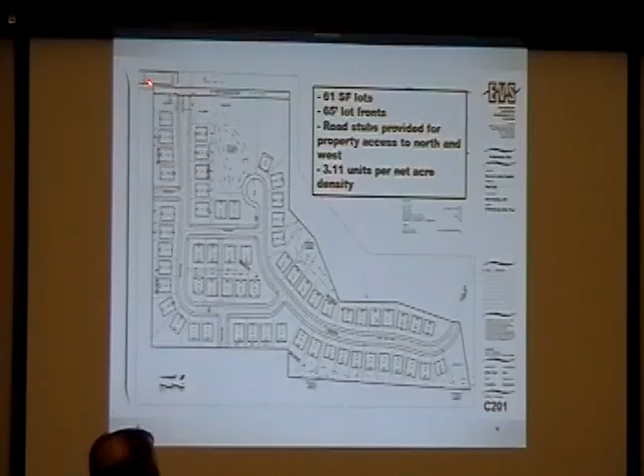The entrance here, coming southbound from County Road 19, the county has asked us for a right turn lane in the right-of-way area here, which we've designed into the plan. So there's a right turn lane into the development and 2 lanes exiting. One is a left turn lane and one is a right turn lane exiting the development. We've shown the connection at the request of staff.

We've shown the connection to Grandview right here. Part of our proposal is to add 2 feet of width to Grandview, and where we ended up at Planning Commission was that originally it was thought we'll add it to the north side, and we left it to where we're going to add 2 feet where it's most practical, and it isn't clear exactly where that 2 feet will come from yet. So with a 2-foot widening and then a total overlay all the way out here to 19, that's in the proposal we have now. I think that's about it in that chart.

The vision for the homes is what we feel the market opportunity is calling for, and that is single-family homes. I would guess virtually all of them would be 2-story. There might be a Rambler or 2 built, but probably not very many. Sizes ranging from 2,300 to 2,800 feet above grade. These are going to be 4-bedroom, 2.5 baths. You would expect younger families to be primarily purchasing the homes.

We're going to propose in the architectural covenants a hardboard siding look on the front of the homes. The product names are either LP SmartSide or James Hardie, and then some attractive stone and brick on the fronts. We see finished prices for the homes ranging from the low 400s to the low 500s. We will have an association which will manage the architectural covenants, and then also the outlots in the neighborhood, the storm ponds and the wetland areas, would be owned by the association through that mechanism.

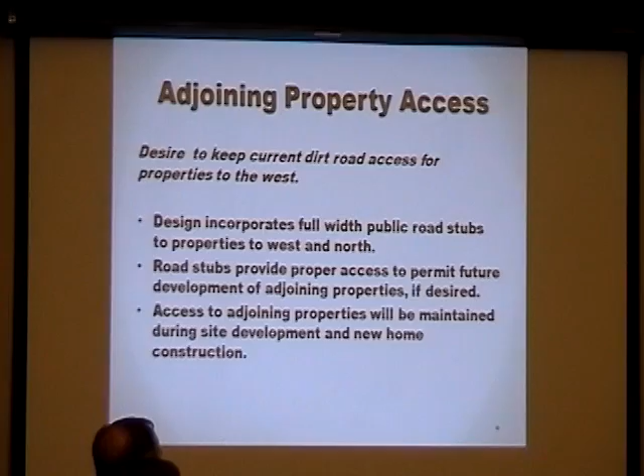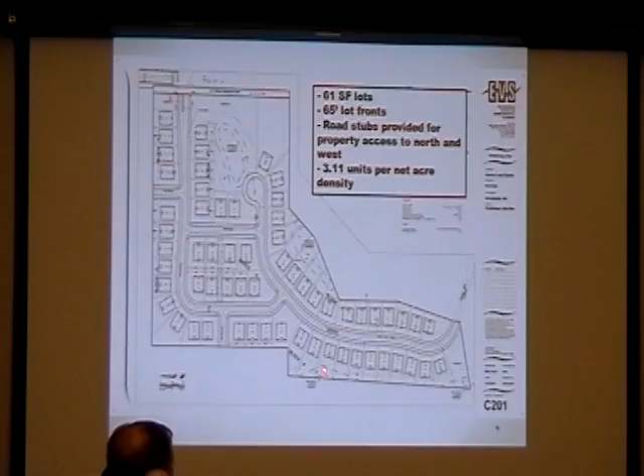It's also going to be essential that we maintain access to the sites during construction. And I think our strategy would be, just going to back up a little bit here. So as we're developing the site, we would probably keep the current road as is, and as we build through the rest of the site, we'll eventually get to the point where this road is built out, and then we can go ahead and have access run through this road, and then this will no longer be necessary. But we will work it out such that obviously everybody has access at every point along the way. We're not going to leave anybody stranded during construction.

Stormwater management. I'm going to have Dave Nash come up here in just a second. But several concerns we heard were the excessive amount of stormwater that's to the west of the property that comes down to Minneapolis Avenue. And also there were some concerns about the stormwater leaving to the northeast and going under County Road 19. And there were some neighbors on the other side of County Road 19 that had some localized flooding problems.

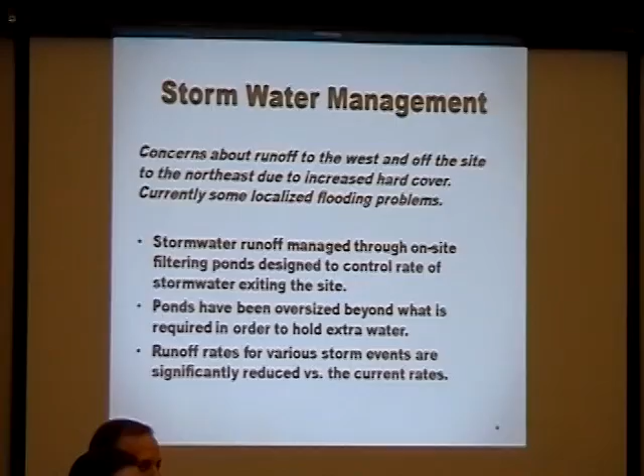And so what we committed to do was to try to oversize the stormwater ponds on the site, and rather than just doing the minimum and keeping the runoff rates where they're at, we tried to oversize them, and we have, and we're spending quite a bit more money to do that, and try to hold as much water on site so that to the extent that the site today is contributing to some flooding problems around it, we're going to make our portion better. I don't think it alleviates everything in the surrounding area because it's more than just this golf course site, but at least we're doing our part in trying to address that issue. Dave, why don't you come up to do the next slide and show exactly what we're talking about here.

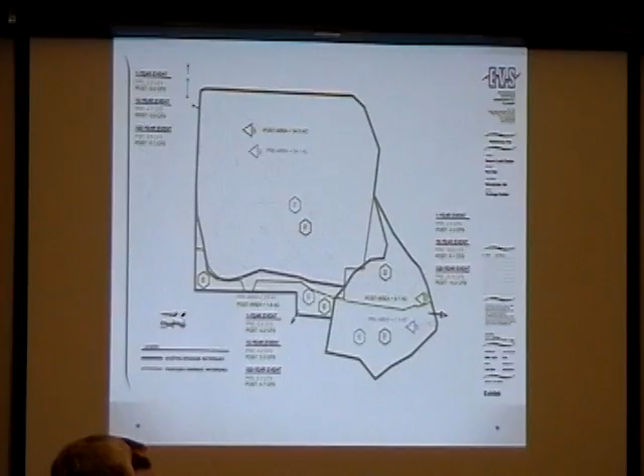Good evening. I'm Dave Nash with EVS Engineering. As Pat said, I'm the civil engineer for the project, and I put together this exhibit. Included in our submittal packet for preliminary plat was a stormwater management plan that city engineers reviewed, and the Minnehaha Creek watershed will review as we proceed in this project.

As Pat said, the requirement for this site and for any development site is post-development conditions have to meet the pre-development conditions for rate control, which is CFS, cubic feet per second. Then beyond that, we have to do some water treatment and filtration, infiltration based on the new NPDES rules. What this exhibit shows is based on our oversize of the ponds and the filtration and infiltration ponds that we're using on the site, we are reducing the flow rates on the site beyond what was required.

For example, there's 2 areas. I have an area that goes out to the north, and the table shows on a 1-year storm event, the pre-development runoff from that site is 2.2 CFS, and post-runoff is 0 CFS, meaning on a smaller storm event, our filtration pond should be able to take all the water and there won't be any water running off. Same goes on a 10-year storm event. The pre-development rate is 4.7 CFS. We reduce it with our ponding and filtration to 0.9 CFS.

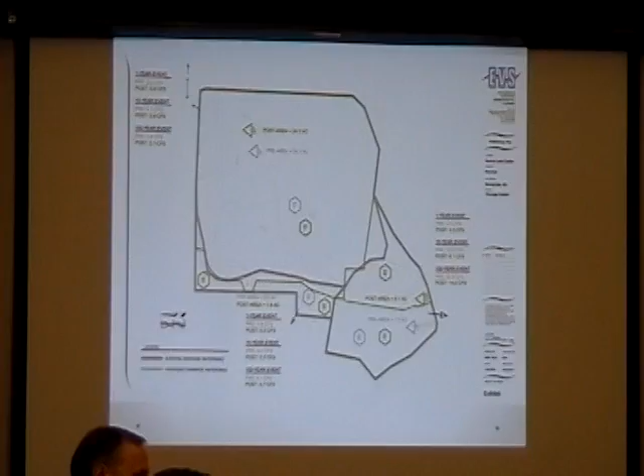Can I ask a quick question on that? Yes. We went to a water seminar last Thursday, and recharge is a huge issue, and we think there'll be some regulations coming down the road. Is there a way that you could use that stormwater pond to irrigate these 61 parcels? It's not a requirement. It would be a significant added cost,

and I don't think these ponds would be large enough. What happens anytime you try to use a pond to recharge it, you end up putting in another well, because when do you water? When it's dry. Yeah. So there's no water in the ponds. You need a well to recharge the ponds itself. But it's not treated.

Pardon? But it will be treated water. Correct. That's what we're trying to get away from, is using drinking water to irrigate people's properties. Understood. So I just wondered if you'd considered it. Okay. Let's keep going here.

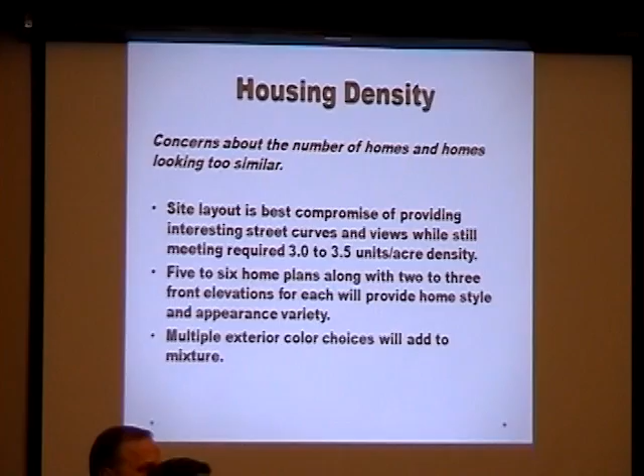Housing density. Now this is something that has been brought up, and the density is driven by the current zoning for the site of 3.0 to 3.5. We're within that range, on the low end of that range. And so the best we can do is what I had indicated earlier, which is to provide as interesting a site layout as we can and as much home variety as we can. And we feel we've done that, and we're within the range on this.

County Road 19 impacts of traffic. There were some concerns about the additional traffic associated with 61 homes and what it would do to the traffic there on 19. And so, as we've discussed already, the only change Hennepin County is asking for is the southbound right turn lane. For the traffic that goes north to the four-way stop at County Road 151 and 19, they're not asking, to the best of our knowledge, for a traffic light or anything there. The traffic is felt to be well within the capability of County 19, even with this additional traffic.

And so, just for reference points for everybody, the current golf course seasonal peak traffic is about 110 trips a day. It's down from about 160 trips in previous years, which is part of why they had to sell. And so, although there will be more traffic than the golf course traffic with 61 homes, it's not all incremental. The golf course traffic is being replaced with the home traffic of about 305 trips per day.

And then the Grandview connection to the south: earlier plans, we had shown a cul-de-sac there with a breakaway barrier in order to not put the traffic onto Grandview. And at the request of staff, our actual plat submission is what you've seen. We're actually making that hard connection and then improving Grandview by a couple of feet. And so we had been willing to go either direction. We understand that there's pros and cons of each.

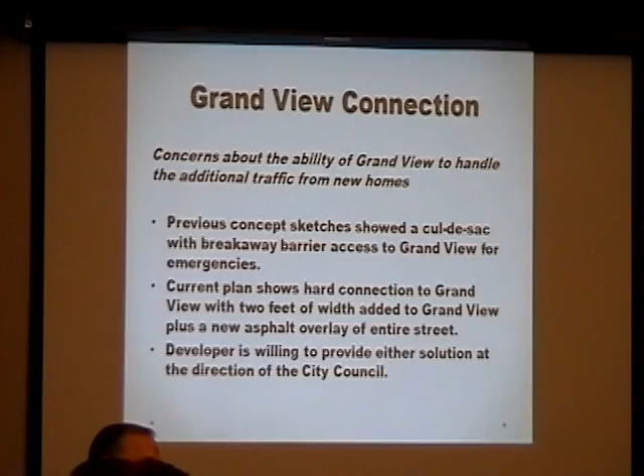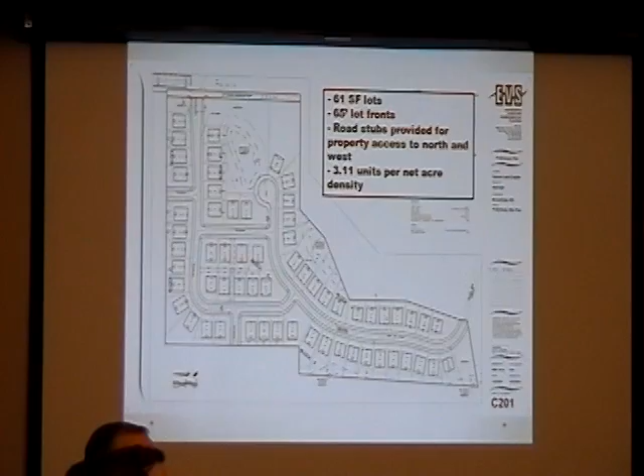But at this point, it sounds like we're going to stay with the connection unless something changes. And so whatever the council decides we would be willing to abide by. And so that's where that stands. And I think that's all I've got here. We'll go back and put this chart back up if there's any questions. Any questions for me now, or would you like to?

I have just one, I think. I was writing some things down when you were talking, and maybe I'll wait until the end; maybe that's what I'll do. I'm anxious to hear from our residents as to what they said. There were many of them here at Planning Commission, and although we've all agreed that we won't do it the same way as we did there, since that was a public hearing, I do want to hear from them and see how it's coming. So why don't we do that first, and then maybe you'll have answers for them as well. Okay, thank you.

Council, do you have any questions before I start with the people? Or? Until later. Okay. Jody Youngquist.

Jody and I are pen pals. A couple of you are my pen pals.

All of us, yeah. Madam Mayor, council members and city staff, I'm Jody Youngquist, and I live at 950 Red Oak Lane. So my house is right behind this development, and what will continue to be Red Oak Lane, not Grant Avenue, right, guys? Yes. I have to keep checking on that one.

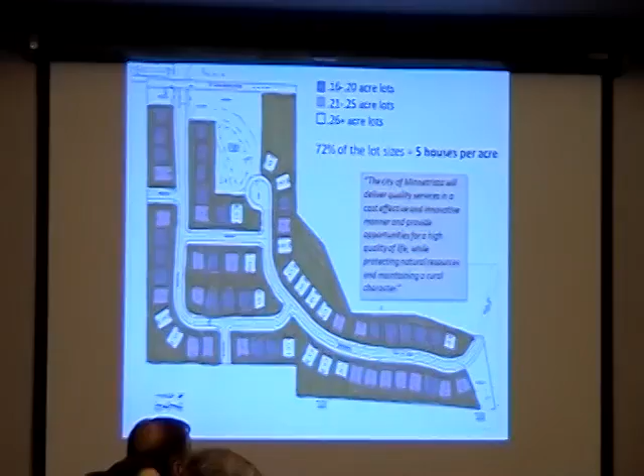First, I just want to thank all of you, all of the staff and the council members who've taken the time to answer all of our questions over the past week. It's been greatly appreciated. It's my first time going through this process, and I've been very grateful for everything. Oh, thanks. Secondly, I want to thank you for letting us have a little moment to speak today. We've done our best to consolidate the thoughts of our neighbors and be respectful of your time.

I've lived in Minnetrista for 16 years. I'm the newest neighbor on Red Oak Lane. Most of my neighbors have been there for 25, so I'm feeling a huge impact on this. I can't imagine how they're feeling. My children take the bus to school from the Covenant Church parking lot, at that bus stop, and I drive downtown to work every day, so I'm well aware of traffic concerns at both the Grandview Avenue exit and the Red Oak.

Red Oak Lane and the neighborhoods surrounding the golf course will be severely impacted by this development, and what we're asking is that the city and developers take our concerns seriously and work with us to find solutions that allow a beautiful development, as well as maintain the rural character of the neighborhood. And I think it's really important that we take a look at the mission statement for Minnetrista and keep that in mind as we're doing this.

The city of Minnetrista will deliver quality services in a cost-effective and innovative manner and provide opportunities for a high quality of life while protecting natural resources and maintaining a rural character. And I have real concerns about maintaining a rural character with what we're looking at here. Green space is one of our big concerns, and we know we can't change the density. The horse has left the barn. We beat it to death a week ago. We don't need to do that again.

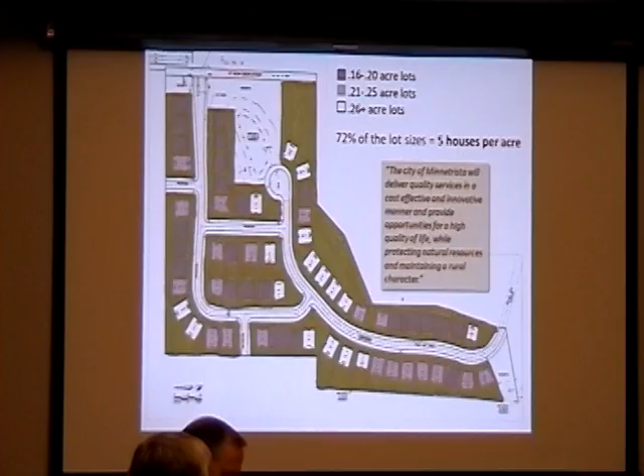I feel in all fairness, the city should try to give back the green space to this development wherever we can. Money taken from the development for park dedication fees and trees should be put back into the development versus being collected and given to another community that has not been affected by this. And as stated, the developer needs to remove 54% of the trees, and from what I read, and the fact that there's no room for more trees to be put back in here, the city will be receiving $218,600 in fees for the trees.

We'd like to see the city support expanding replanting boundaries for environmental enhancement on the private property surrounding the development, and to further define the privacy perimeter and help maintain at least a portion of the views that the current residents have. And I was really glad to see what these guys are doing with the trees in these lots, but we have a lot of money left over for trees, and it would be nice to be able to go outside the boundary, which I believe you guys have the ability to change, to help improve the view of the houses that surround it.

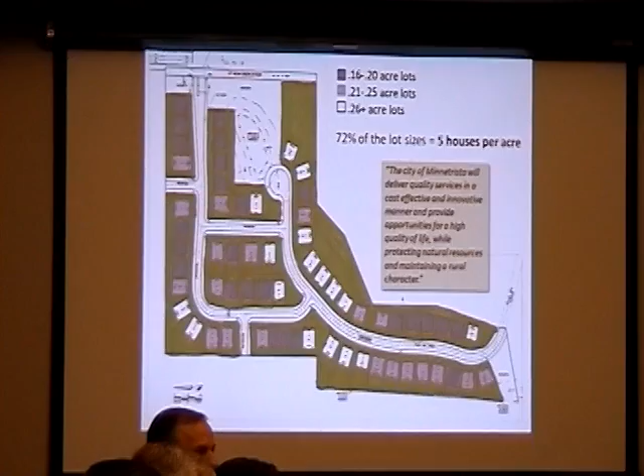And if the city is collecting this much money, we'd be curious to know, where does that go? It goes to the park dedication fund. It can be used for nothing but park. Okay, no, the tree fees, sorry. Oh, the trees, I'm sorry, you're at the trees. That's $218,000. Yes, that's a very good question. I mean, and you can have a say-so in that to some degree as well. We have a say-so, or?

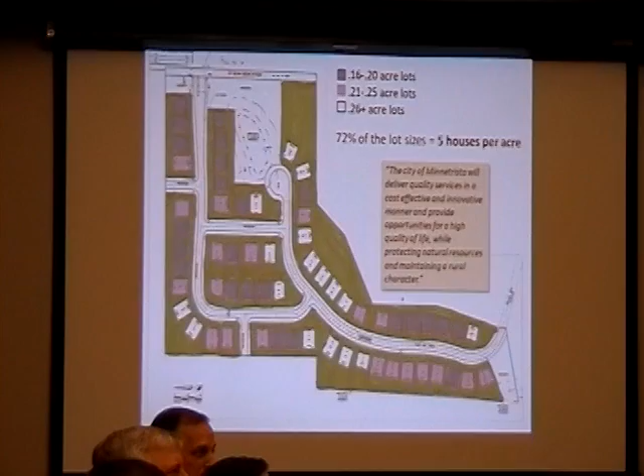Well, if you want to form your group and say, you know, we get X amount of dollars, and we have a tree inventory, right, Matt? Before we put, am I way off base here? Madam Mayor, members of the council, what she's referring to is our tree enhancement fund. Right. So $100 per caliper inch would be required per what they're not meeting in our ordinance.

We do have a policy set for that tree enhancement fund. The main goal of the fund is to replace trees within the community. That could be done in various ways. One thing she suggested was some of that money be allocated to the adjacent property owners. That certainly is acceptable per the policy. Another would be replacing boulevard trees throughout this community, replacing park trees or planting more trees in the park.

The main goal of it is trees, but it also allows for environmental enhancements too, which can further be defined and is up to the discretion of council per the policy where it goes. But what she is suggesting would be allowable use of that tree preservation fund if the council so chooses. I think you put it better than I did. Thank you. Sorry. And we respectfully ask that you give as much of that back to this community as you can to try to help keep it pretty.

Another question that we had regarding the trees that are going to be on the perimeter, and I don't know if this is for now or for later, but will that buffer of trees be protected by the association to prevent future property owners from taking them down? Or can an association have that in there, that you can't just go and cut down the trees in your backyard? Maybe Ron could respond, or Dave, you've probably been working on this for so long.

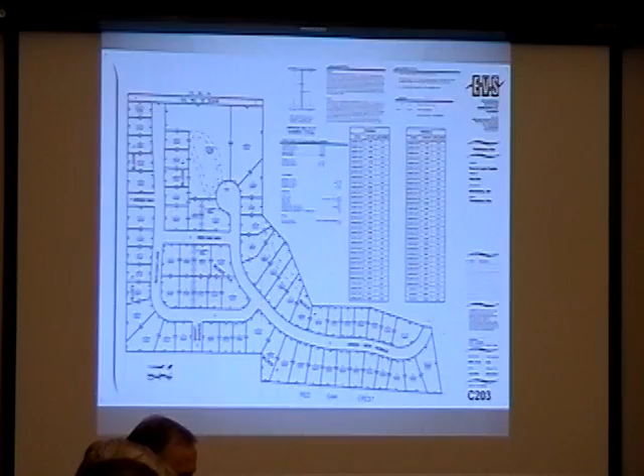The last thing is just mentioning the cul-de-sac. The city engineer made the point at the planning meeting regarding the desire for through-street traffic for emergency vehicles and city plows. I think the emergency vehicle concern could be taken care of with an emergency breakaway entrance. And I think it's really important for you to consider the safety next to the park. It's 40 feet from the development. A through street's going to mean more traffic by the park, which is the only place the children have to play, and they're walking up the street to get to the park. And current users of the walking park take that trail up from Minneapolis Avenue and cross Grandview Avenue to get there.

And in closing, I just want to say I feel like the City Council does have a choice when it comes to maintaining the rural character of this development. I've pointed out several ways you can reduce the number of homes, add green space, and make it a safe place to live, while still meeting the Met Council requirements. We fought hard to get the density down, and the lots are so small and the houses so close together, it no longer feels like the Met Council is forcing us to cram all this stuff in. We're making some choices here on our own to not have green space and to have a cramped environment. And thank you very much for your time.

Thank you, Jody. I appreciate your presentation a great deal.

The second person is Sue Harrison, I believe. Yes. Hi, I'm Sue Harrison. I live at 4935 Grandview, the end of the road. Madam Mayor, council members, and staff.

Not to be disrespectful, but I doubt the Planning Commission, City Engineer, nor staff have any understanding of the safety issues that will result from making Grandview a through street. I'd like to give you a little view of my world on Grandview. As I said, we're the last house at the end of the street.

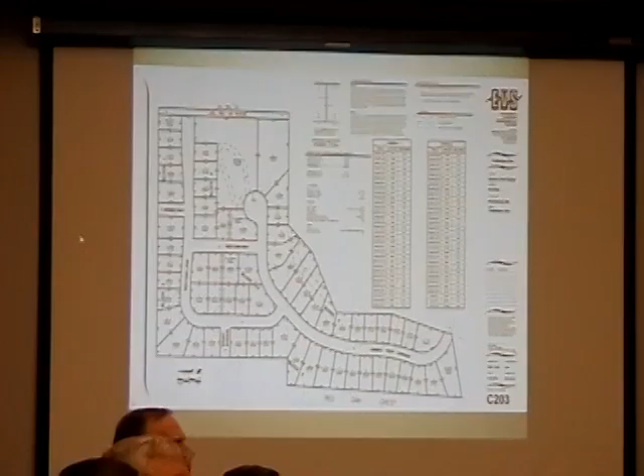I mean, that would be really tough for residents to have company. So you don't go down to 20, I don't know, maybe you go down to 24. You can still park on either side of 24 and still have a car get by. Right, and I know some communities do parking on only one side, and that gets to be an issue. I don't know.

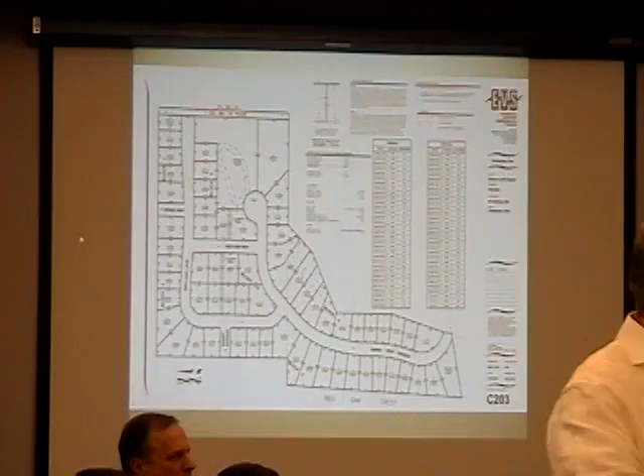Yeah. I guess the only other comment that I was going to make is, I know you're looking for 65-foot wide lots, when our standard is 70. And you're at about 7,200 square feet, and our standard's about 9,500. I was wondering if there's any way that we could increase those. I know we can't get them to 70, but get them close to 70.

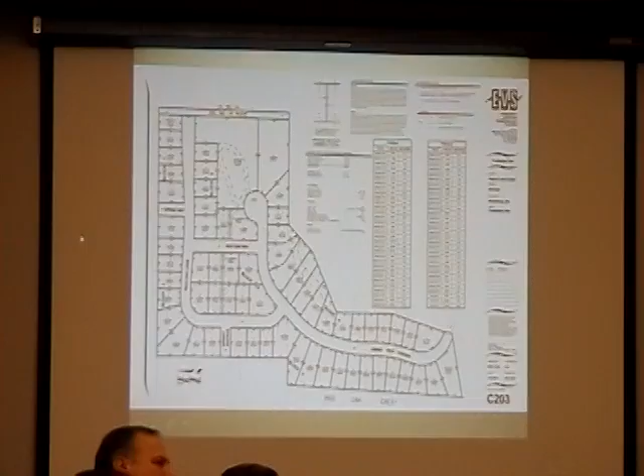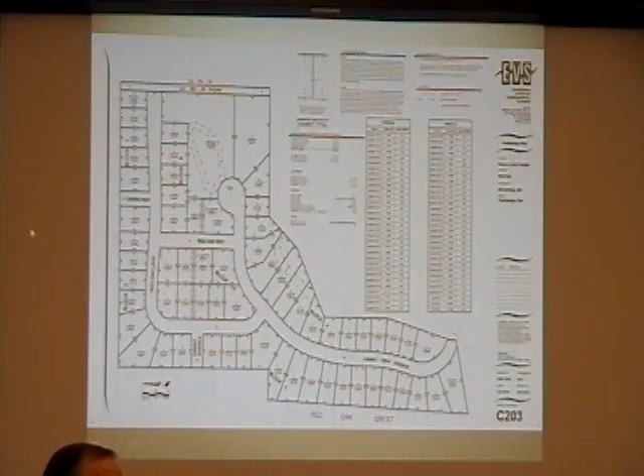As you look at the plat here, we've looked at several options, and the PUD exceptions that we're asking for are really what is necessary. It's just not possible to have 70-foot lots. Just to add one thing: we're asking for the PUD down to 65 feet for flexibility, but if you actually look at our preliminary plat and the dimensions, there's not a whole lot of lots that actually are 65 feet.

We need that in some of those areas to meet the density, but for example, if you pull out our preliminary plat on sheet C203, the majority of those lots are 70 feet wide, 82. Every lot in this development isn't 65 feet wide. There's just some of them that are, and we need that flexibility to get down to the density required. Do you know how many are down that far? I have not. That would be interesting. Give me 5 minutes and I can maybe count that.

Okay. Right, and where are the 65-foot lots? Let's go through it here, Dave, because that would be good. I can tell you the 65-foot wide lots are along that south end along Grandview. Right, that's what it looks like. And what would be the problem with making those lots a few feet wider? Then we would lose lots and we wouldn't meet the density. Well, you're already above the minimum, right? Yeah, we are a couple lots.

First of all, I think we should talk about a couple things. The 58 is really 59, I think, because if you take the net area and you divide by 58 lots, you end up with a 2.96 density, not a 3.0 density. So you need 59 lots when you do that calculation to get over 3.0 density. If you go the other direction, you end up with a rounding error. I know it's a nit, but I think 59 technically makes the formula work.

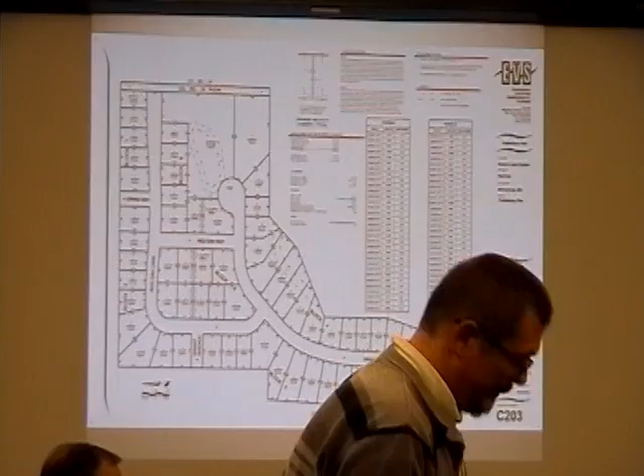But we always meet 65 feet at our front setback, and there's only 15 of them that are 65, the rest are over 65. Well, for sure, it's a very difficult piece of property to develop. It's very emotional because people have used it for lots and lots of years, and we all liked the Wang Stearns, and they built a lot of things out here, and so it's hard. So, try to get the best you can out of it.

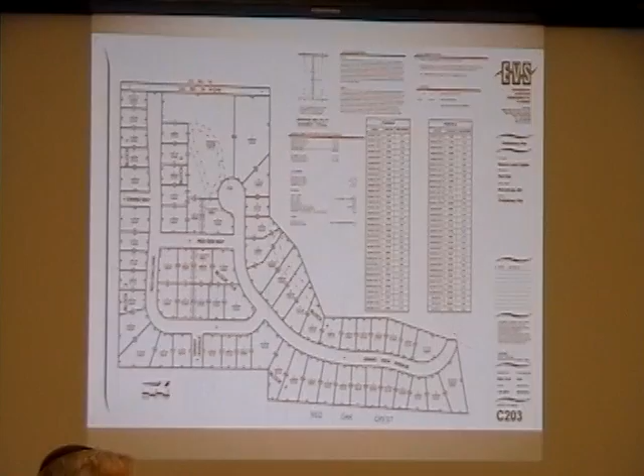Do you have anything to wrap this up with, Mike? Because we do have to move on eventually. Yeah, Madam Mayor and Council, you do have a number of action items for you this evening. Again, there's some considerations for you on the table. From my perspective, there seem to be at least 2 main areas of concern. One is the cul-de-sac versus through street. And the other is the park dedication versus the donation of the land. Those really seem to be the 2 main issues.

Probably a couple issues at stake are sidewalks, maybe width of the road. And there might be a couple other ancillary ones beside that. Those are kind of the main issues. Help me with one thing though, because I talked to you many, many times, and Ron and the planner, about cul-de-sacs, and we talked about them to death, and yet we're still considering them, so it's a case-by-case basis still? Is that what we're saying? Ron, well, anybody, I don't care.

I think that's the discussion at hand for the council, talking about the cul-de-sac versus the through street. You've heard from the developer, they are indifferent to how that is designed. They will accommodate either or. You have a recommendation from the Planning Commission and from city staff that a through street be considered. And ultimately, as Mr. Beatty said earlier, that decision is yours.

As part of the application, you will need to decide which route is better for the city and the community in general. And so you've heard arguments both ways. Staff is not intentionally throwing it on your lap, but it needs to be a discussion and a decision by the council as to which is the better way to go. I'm gonna go directly to Ralph and Susan.

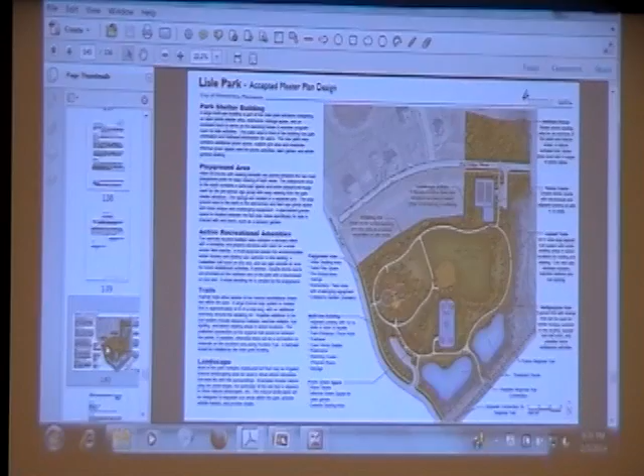City Council ultimately did approve that capital improvement as part of the budget, and what we're looking at this evening is a proposal to prepare the plans and specs and go out for bid of the construction of those tennis courts. Plans to be prepared by the city engineer. They would again prepare those plans and specs, go out for bid, and then perform construction inspections as the process moves forward.

So the resolution before you would be to authorize WSB to do the plans and specs for the projects, in which time we go out for bid and bring those bids back to City Council for approval for that project. Timing-wise, looking at trying to get this set up so it can start as the weather would allow, as early as possible in spring, so that hopefully it could yet be utilized for the summer of 2014. Do we need to have a number in there, or has that already been approved?

The number is listed in the scope of services. Okay. That's as attached in your packet. Looking at an estimated cost right now with the project itself, the total cost with plans and specs, construction documents for the project to be at $150,000, all said and done. That again is a preliminary estimate, but that would be the total cost, again out of the Park Dedication Fund. Great. Questions for David? If not, I'd entertain a motion.